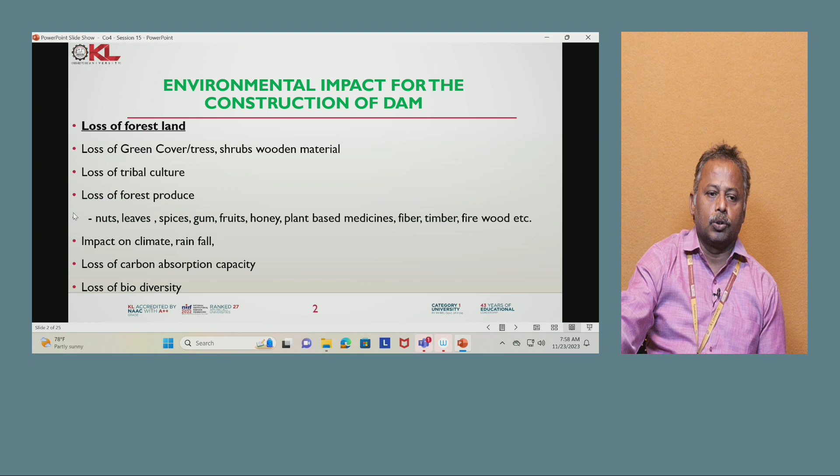Then due to the construction, climate condition also changes, and rainfall also reduces. Then loss of carbon absorption capacity due to the tree loss, the carbon absorption capacity also will reduce. Then loss of biodiversity. So these are the loss of forest land.

Next, it reduces the cleaning capacity of pollutants. Then loss of tourism and loss of aesthetic effect. Then forest reduces the runoff and increases the infiltration. Then it contributes to floods. So these are the various losses for the forest land.

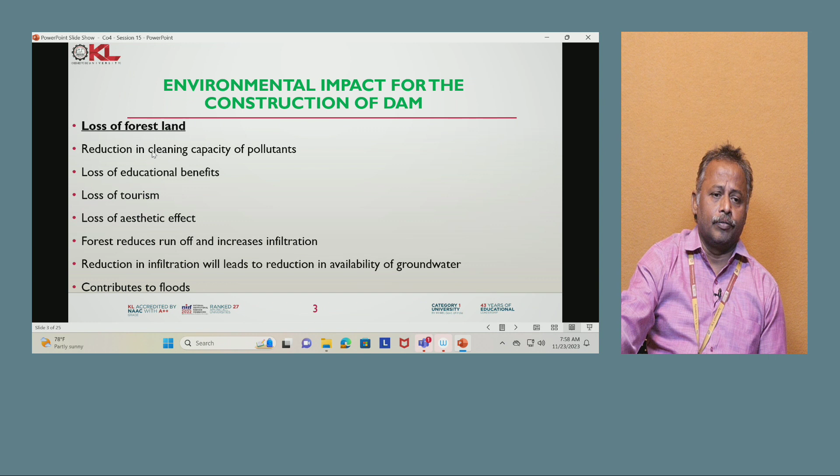Next, loss of wildlife due to the construction of dam. So loss of wildlife shelter will lead to the migration of wild animals. Then another one is the loss of biodiversity. Then species may become extinct.

Livelihood of tribals will get affected. So these are the various problems to the wildlife.

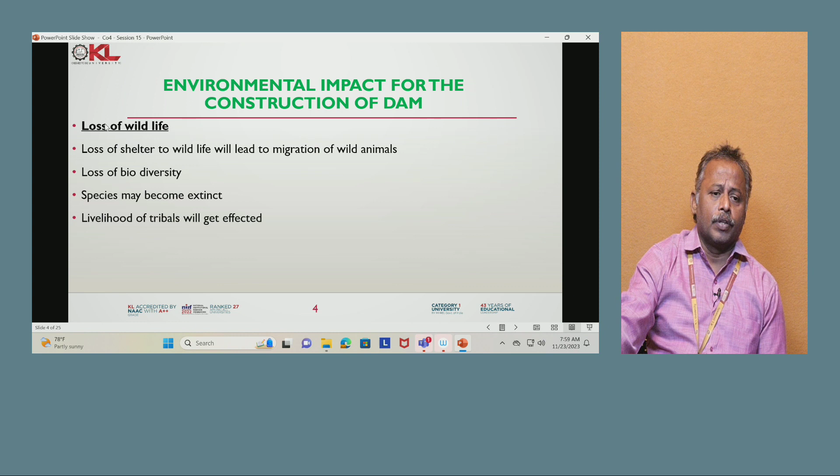Next, loss of agricultural land. So the construction of major dam and reservoir mainly leads to the inundation of several villages and thousands of hectares of farmland. So the farmers lose their own land, and it affects the livelihood of the farmers and leads to migration. So it is a reduction in agricultural productivity.

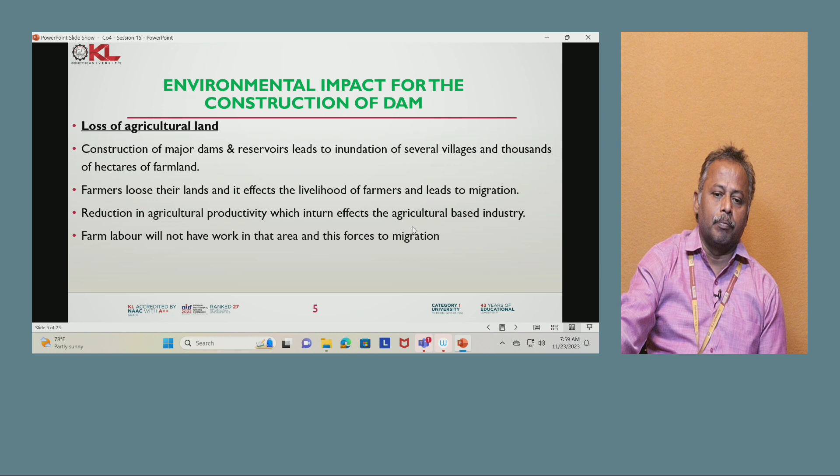And it affects agriculture based industries. Then farm labor will not have work in the area, and it mainly forces migration. Then similarly for villages on the upstream side.

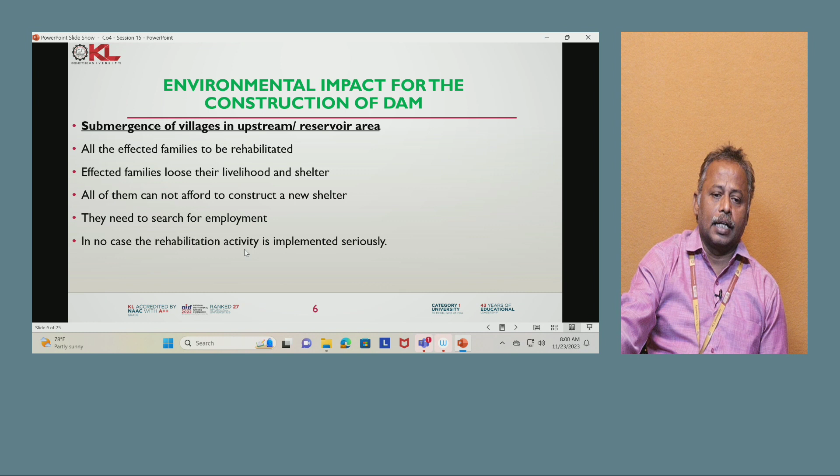So all the affected families need to be rehabilitated, and it affects the families, causing loss of livelihood and shelter. All of them cannot afford to construct new shelter, and they need to search for employment also. In no case is rehabilitation seriously implemented.

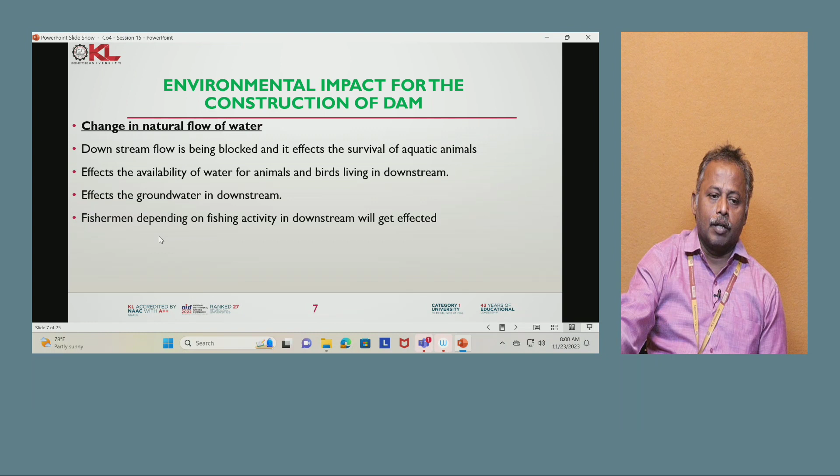Then change in natural flow of water. So the downstream flow is blocked, and it affects the survival of aquatic animals. So it affects the availability of water for animals and birds living on the downstream side. It also affects the groundwater on the downstream side. The fisherman depends on the fishing activity in the downstream only.

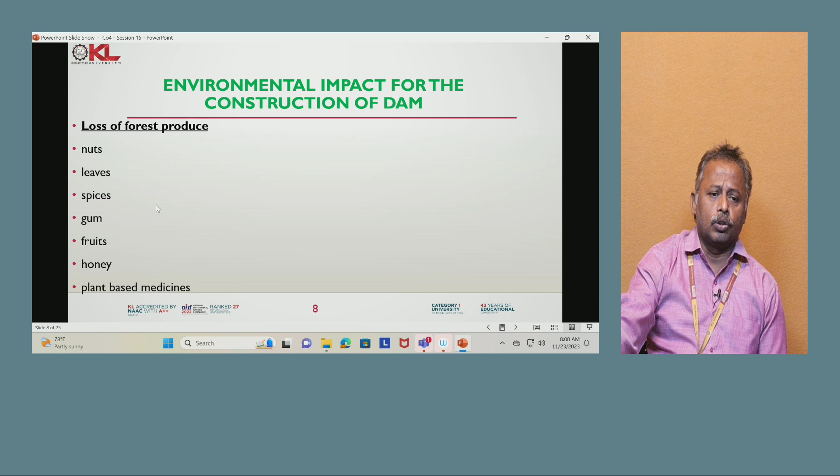Then loss of forest produce like nuts, leaves, spices, gum, fruits, honey. So these forest products also will be lost.

Then impact on climate and rainfall. So the loss of forest cover reduces the carbon dioxide absorption capacity, and the oxygen given also comes down. Due to this activity, the temperature level also will increase, and global warming also will increase.

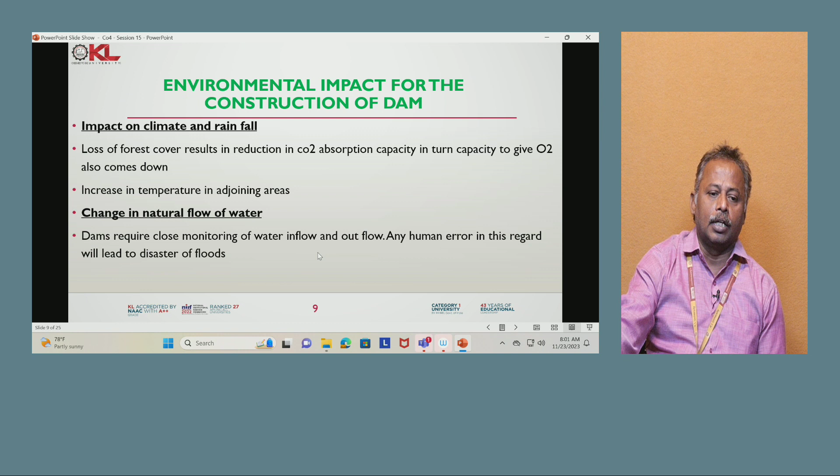Then change in the natural flow of water. So the dam requires close monitoring of the water inflow and outflow. So any human error in this regard will lead to the disaster of floods.

Then measures to reduce the impact of construction of dams. So if the dam will block the migration of any aquatic fauna, the design should include additional infrastructure and facility for movement, like fish ladders.

So this reduces the potential damage caused by clearing, and only the minimum amount of vegetation necessary should be cleared.

So during construction, a bypass channel should be used to divert flow around the construction site to prevent sediment being transported downstream.

So the dam should be built during the dry season to allow the construction to reach a sufficiently high standard without the dam being filled with water.

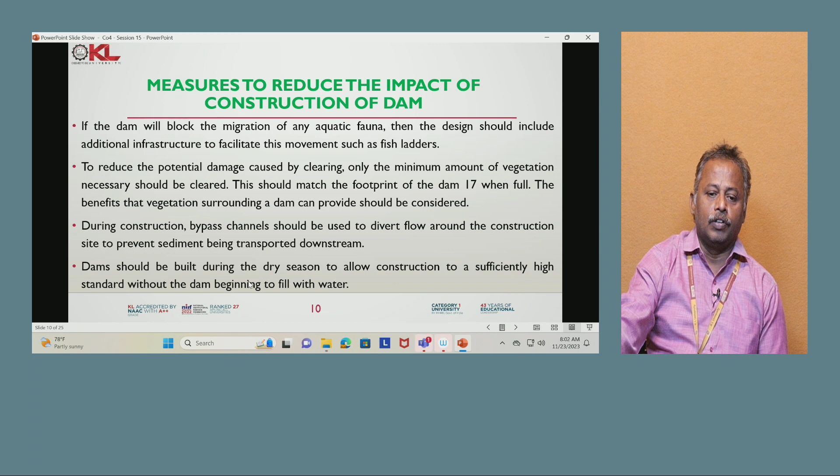Then another solution: some seepage from the dam will inevitably occur. A rate of 10 to the minus 9 meters per second is an acceptable level of seepage. Using compaction, and material additives like concrete or bentonite, geotextile or fabric, can reduce water loss through seepage.

Then environmental water provisions are an important component to be determined, if the dam is likely to threaten the ecological value of the catchment.

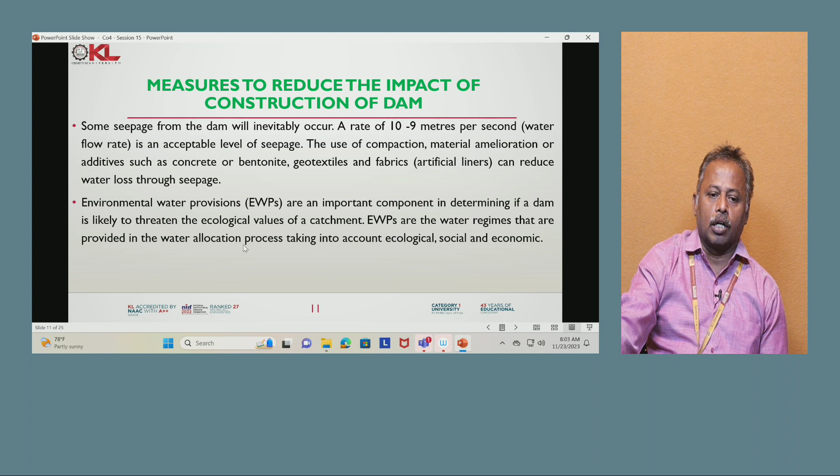So environmental water provisions are the water regimes that inform the water allocation process, taking into account ecological and socio-economic factors. Water quality testing should be carried out to determine if water contains toxins or pathogens. Then good management practice plays an important part in controlling fluctuation in water quality, and regular monitoring and maintenance of the dam is recommended.

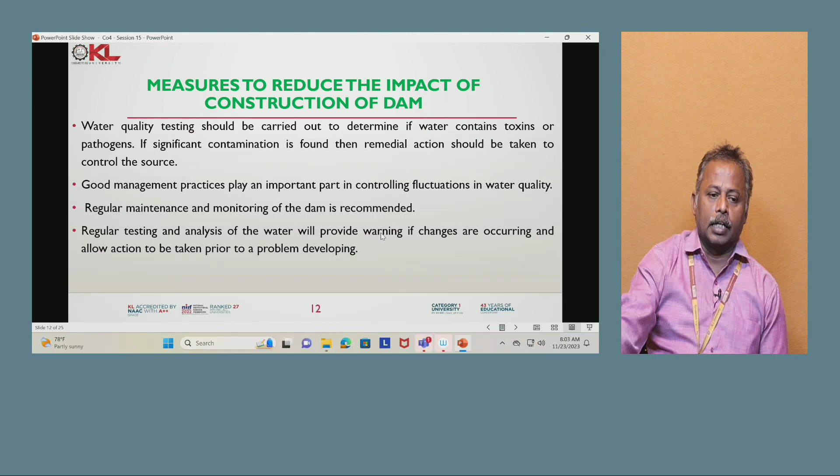Regular testing and analysis of the water will provide a warning if any change is occurring and allow action to be taken before the problem develops.

Next we will discuss the environmental impact of the construction of a highway project. What are the environmental impacts that happen due to the highway project?

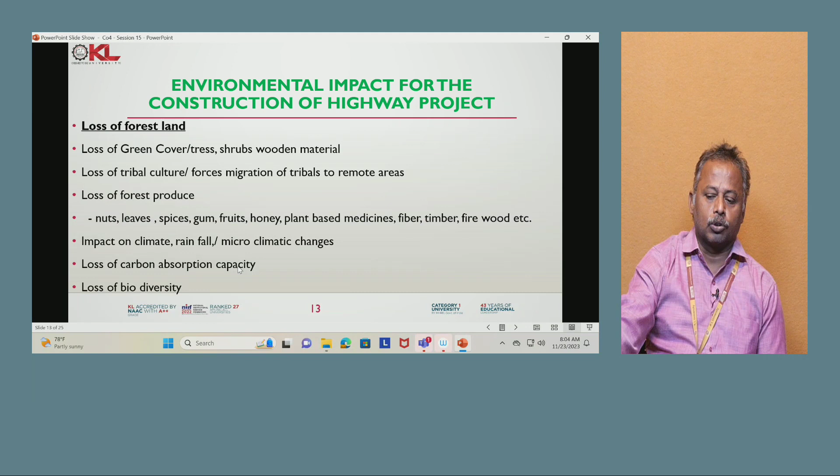First is the loss of forest land and green cover, then tribal culture loss, forest produce loss like nuts, leaf, fruits, honey, and medicine plants. Then impact on climate condition, loss of carbon absorption capacity, and loss of biodiversity.

Next, loss of forest land results in reduction in the cleaning capacity of pollutants, loss of educational benefit, loss of tourism, and loss of aesthetic effect. Forest also reduces runoff and increases infiltration. These are the various losses of forest land.

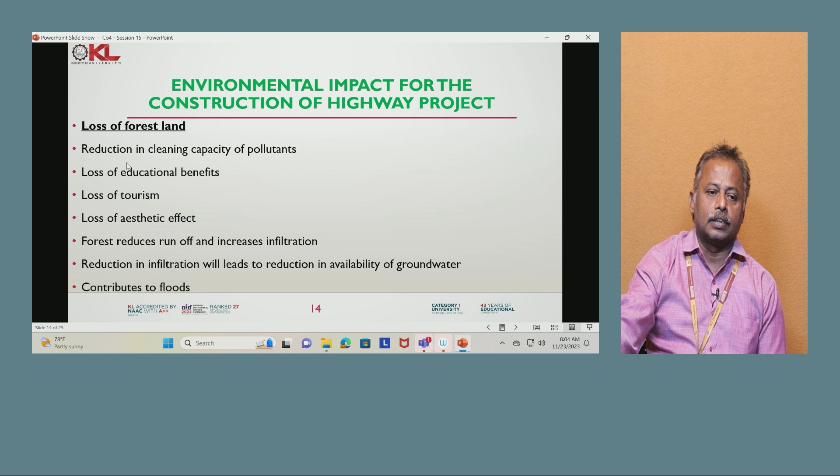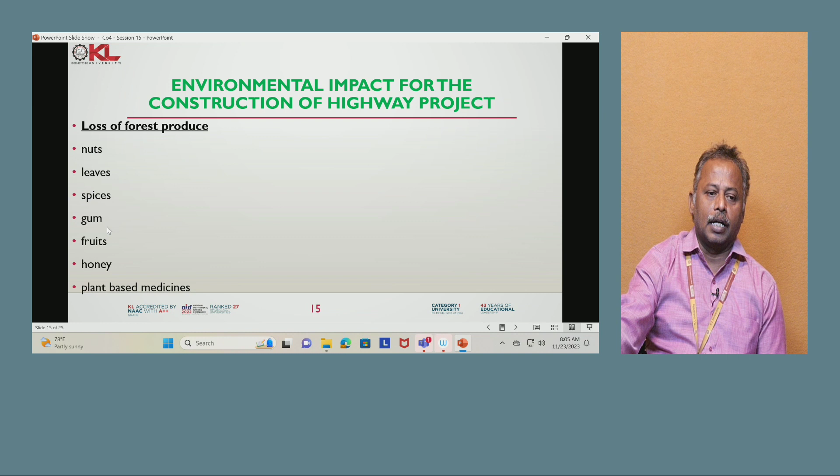Then loss of forest produce like nuts, leaves, spices, fruits, honey, and medicine plants will be lost due to the highway project.

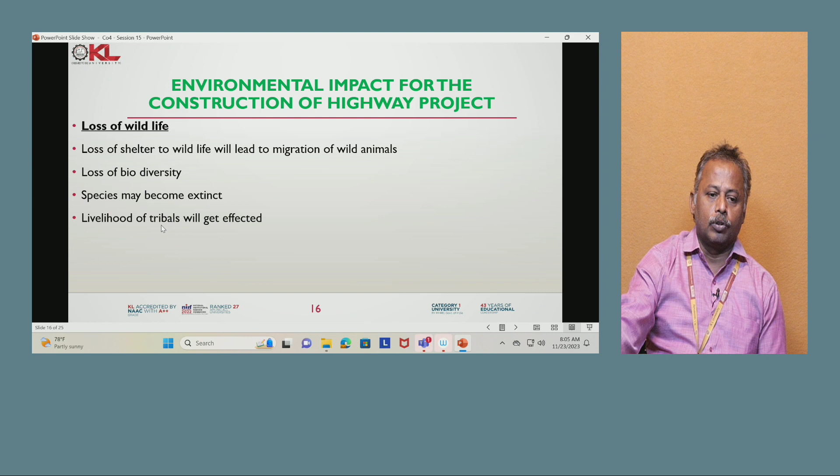Then loss of wildlife - the loss of shelter to wildlife will lead to migration of wild animals, and the loss of biodiversity, species may become extinct, and the livelihood of tribals will get affected.

Then loss of agricultural land - farmers also lose their own land, which leads to migration, and the agriculture produce will also reduce.

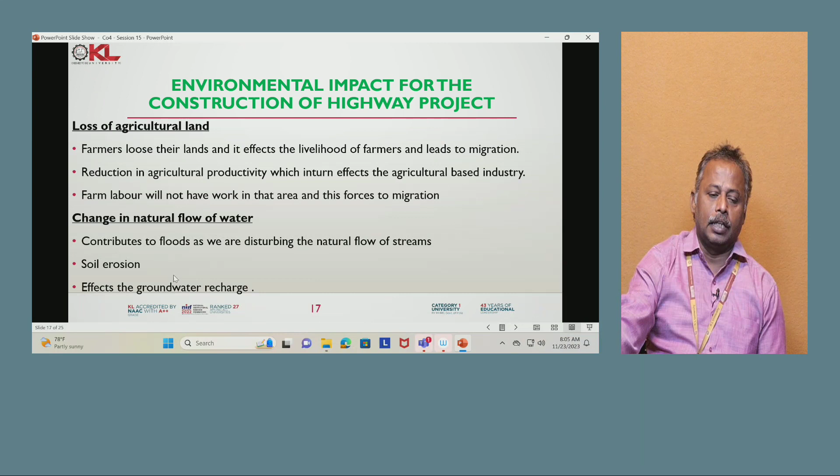Then change in the natural flow of water contributes to flood, disturbing the natural flow of streams, causing soil erosion, and affecting groundwater recharge.

Then impact on climate and rainfall - due to the loss of forest cover, there is reduction in carbon dioxide absorption capacity, so automatically the temperature level increases.

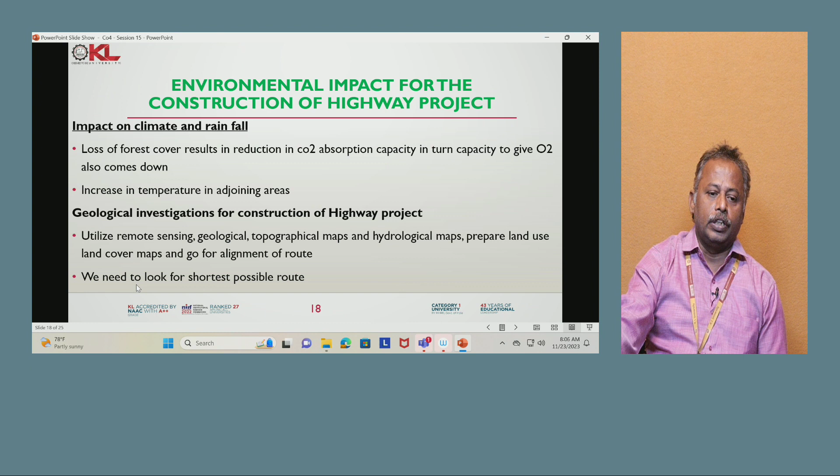Then geological investigation for construction of highway projects utilizes remote sensing, geological and topographic maps, and hydrological maps to prepare the land use and land cover map and to go for the alignment of the route. We need to look for the shortest possible route.

Next is how to reduce the impact of the highway project. First, utilize the latest technology available, such as remote sensing, to prepare the land use and land cover map and alignment of the route which causes minimum damage - we can choose that one.

Then avoid passing the route through the forest to the possible extent. If required for the road to pass through the forest, go for compensatory afforestation. Then ensure the highway runs away from residential and sensitive areas, so that the public will not have disturbance from noise pollution.

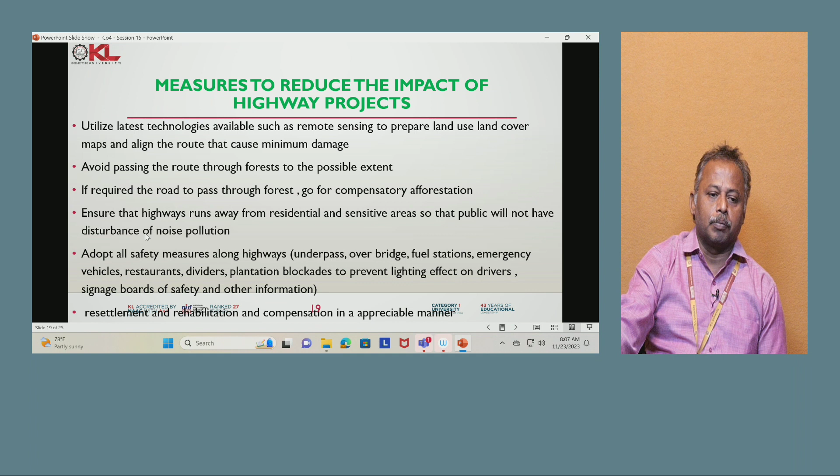Next, environmental impact of tunnel construction. Mainly, due to tunnel construction, there is habitat disruption. Tunnel construction disturbs local ecosystems and wildlife habitats. In some cases, tunnels may pass through ecologically sensitive areas, which can result in long lasting damage to local ecosystems.

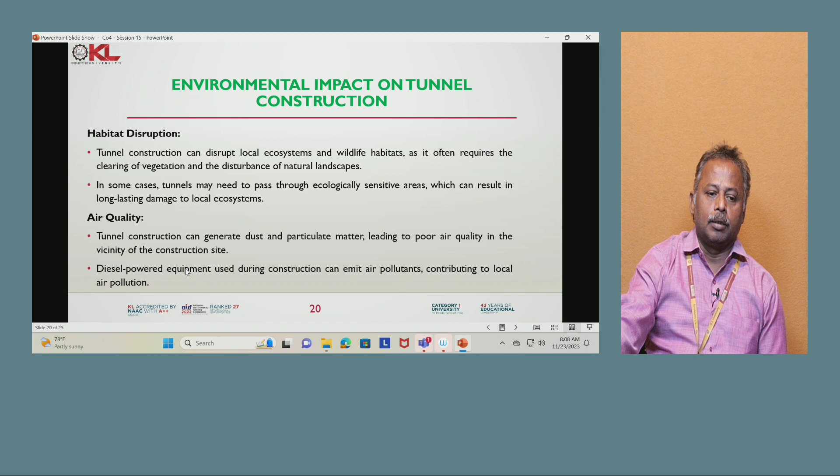Then air quality - tunnel construction can generate dust and particulate matter, leading to poor air quality in the vicinity and construction site area. Diesel powered equipment used during construction can also emit air pollution.

Next, noise pollution. During construction of a tunnel project, it generates significant noise levels which can be disruptive to both nearby residents and wildlife animals. Noise mitigation measures include barriers and scheduling work during less sensitive hours.

Next, water quality - tunnel construction may involve dewatering activities to control groundwater level, which has the potential to lead to release of contaminated water into nearby water bodies.

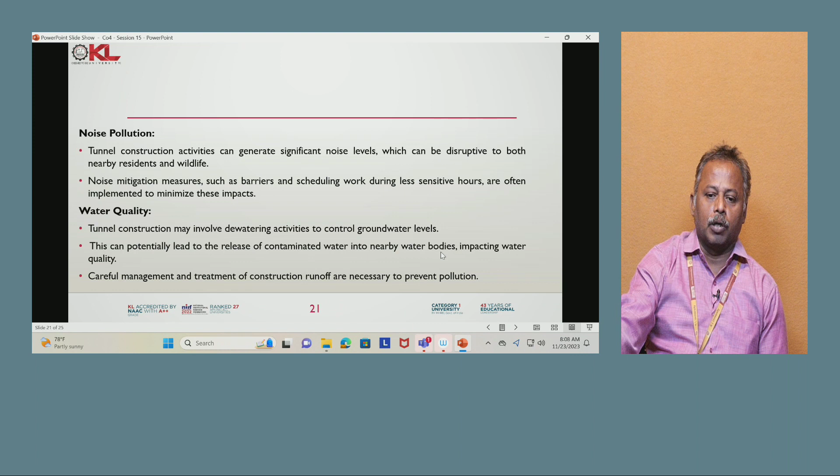Next, geological impact - tunnel construction impacts the stability of surrounding geology, potentially leading to subsidence, ground settlement, and other geotechnical issues.

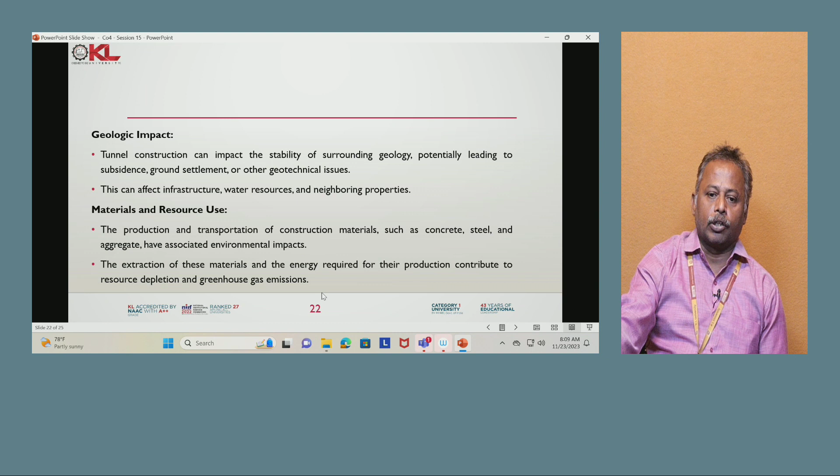Then material and resource use - the production and transportation of construction materials like concrete, steel, and aggregate is associated with environmental impact. The extraction of materials and energy required for production contribute to resource depletion and greenhouse emissions.

Next, energy consumption - tunnel construction requires significant amounts of energy, particularly for tunnel boring machines and ventilation systems. This energy intensive construction activity leads to increased carbon emissions.

Next, water resource usage - tunnel construction may require the use of large quantities of water for dust control, material processing, and other purposes.

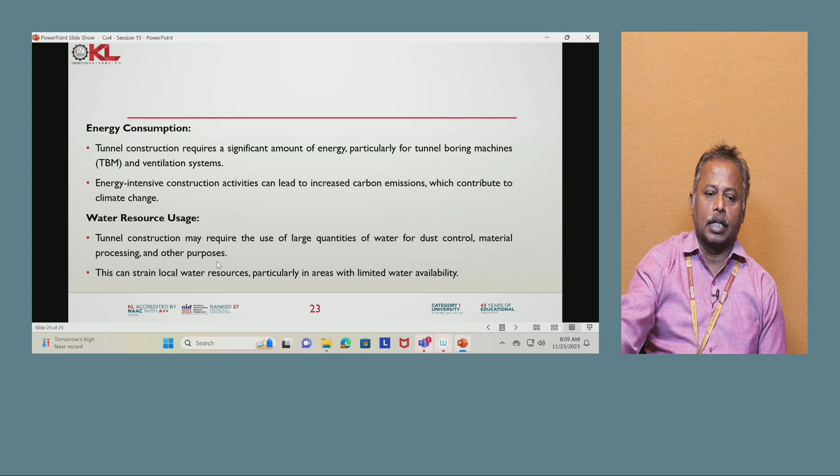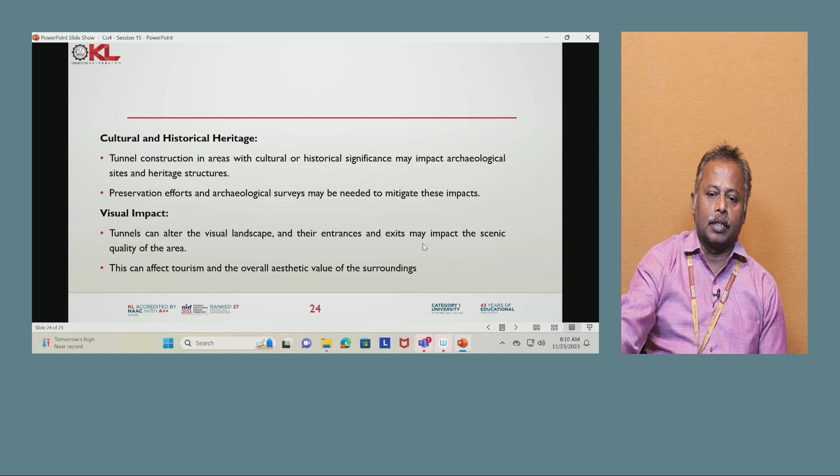The tunnel alters the visual landscape at its entrance, and this affects the aesthetic quality of the area. Thank you.